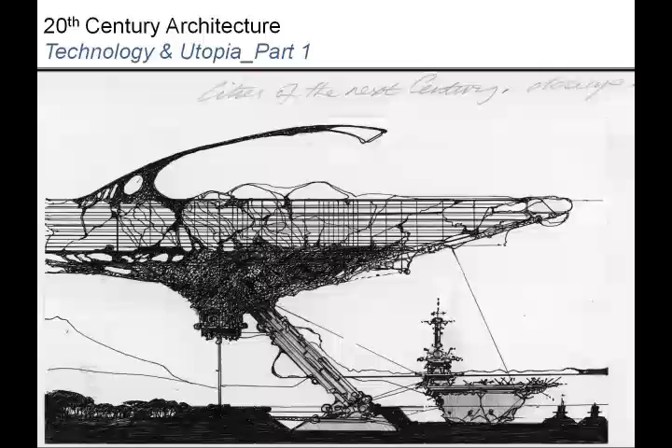Utopia has been a theme through the 20th century. This is the idea of an imagined place or designed place in which everything is perfect. We've seen examples of utopian urban planning.

In this particular lecture, we're going to look at utopia and technology as it's manifested in the later half of the 20th century. What we see is an emergence of demand for the democratization of architecture through the mediation of technology. The social and economic shifts at the end of the 50s formed the demand for a new functionality and led to a reconception of architecture beyond the built singular object.

So architecture as an environment, architecture as a spatial field for the expression of the relations and processes of an increasingly complex world.

What we will see in today's examples is that from the late 1950s to the early 1970s, there were several groups of architects who radically modified the boundaries and definitions of architecture. The rejection of the modern movement, specifically the paternalist practices, and now there is a quest for an other architecture. These radical groups seem to almost unanimously attempt to orchestrate a liberation from architecture, which until then was perceived as a discipline oriented toward construction.

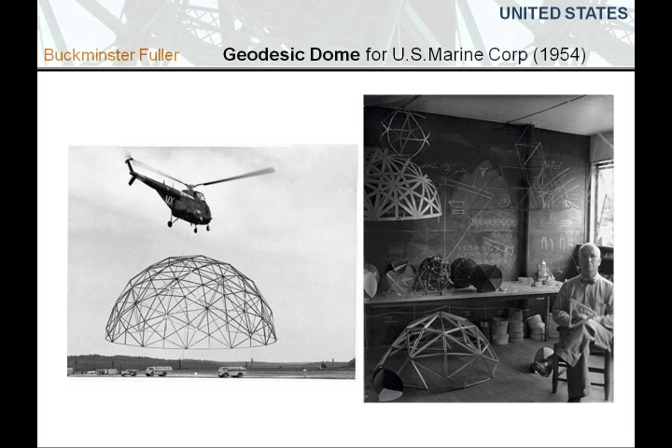This was designed for the U.S. Marine Corps in the 1950s, and again was proposed as a quick-assembly prefabricated element that uses geometry to create an efficient and extremely stable form.

Here you can see the cover of a document that was the study of shelter logistics for the Marine Corps Aviation.

So in the 1950s, the U.S. Marine Corps put the geodesic domes of Buckminster Fuller to the test. They concluded that domes were, quote, the first major basic improvement in mobile military shelters for the past 2,600 years, unquote. This particular volume is quite rare and now out of print.

Earlier in lecture we saw Buckminster Fuller's Dymaxion house, and these military-derived forms made their way into civilian and even domestic applications with some tweaking.

In this image, workers are seen assembling the first rows of aluminum tubes in October of 1959, building the Climatron at the Missouri Botanical Garden. The tubes created interlocking hexagons, or six-sided structures, to form a 70-foot high dome that needed no interior vertical support, allowing this huge open span.

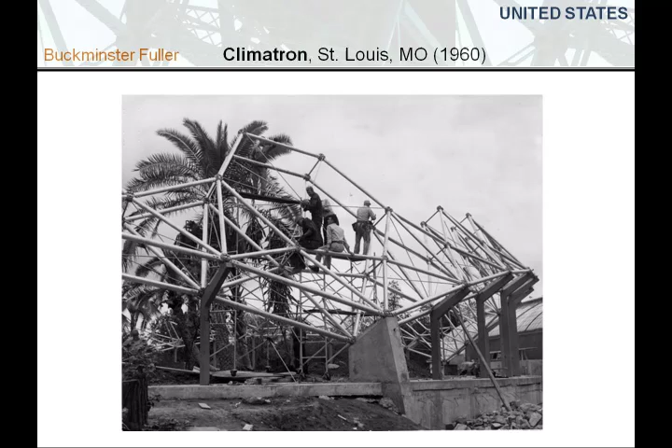It was, in 1960, the largest clear span in the world.

Other speculative projects include this one, the Dome over Manhattan, a project for New York City in the 60s. In the 1960s and into the 70s, the idea of a domed city came out of science fiction and seemed like it might actually become a reality.

The first of these is when Buckminster Fuller proposed a 2-mile wide geodesic dome spanning Midtown Manhattan. The goal of this dome was that it would regulate weather and reduce air pollution.

While the dome over Manhattan was not realized, this project, the United States Pavilion at Montreal's World's Fair in 1967, was. This is now the biosphere, and it is the synthesis of Fuller's philosophy about building and art.

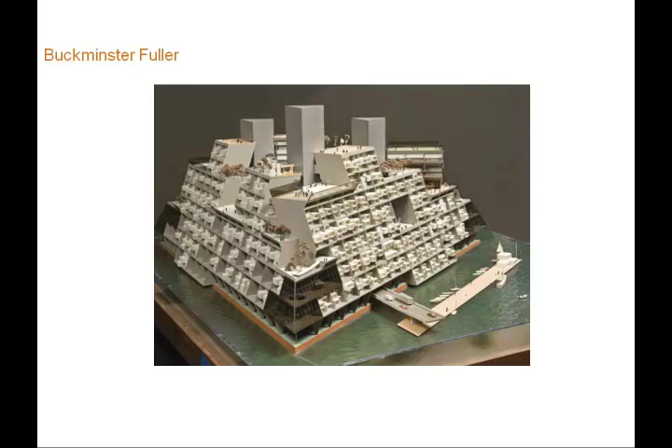So moving on from people like Fuller, and he's really sort of a unique figure in this conversation, we're going to look at a series of other groups, starting with the independent group.

This was a highly significant collection of writers, thinkers, and creative practitioners who met at the ICA in the 1950s. They are most often valorized as the fathers of pop, but I like to think of them as critical thinkers who created practices about visual culture that focused on new ideas.

Leading artists such as James Stirling, Colin St. John, and also Reyner Banham, contributed to this interdisciplinary group and participated in many of their group events.

Speaking of Reyner Banham, this quote is useful for some of what we're going to look at next: when your house contains such a complex of piping, flues, ducts, wires, lights, inlets, outlets, ovens, sinks, refuse disposers, hi-fi reverberators, antenna, conduits, freezers, heaters—when it contains so many services that the hardware could stand up by itself without any assistance from the house, why have a house to hold it up?

One thing the Independent Group did, through a series of exhibitions, was ask exactly these kinds of questions. Growth and Form in 1951 was a science and art exhibition based on a volume by D'Arcy Wentworth Thompson called On Growth and Form. What you can see here is an interest in biomorphic form—biology—and also in structure.

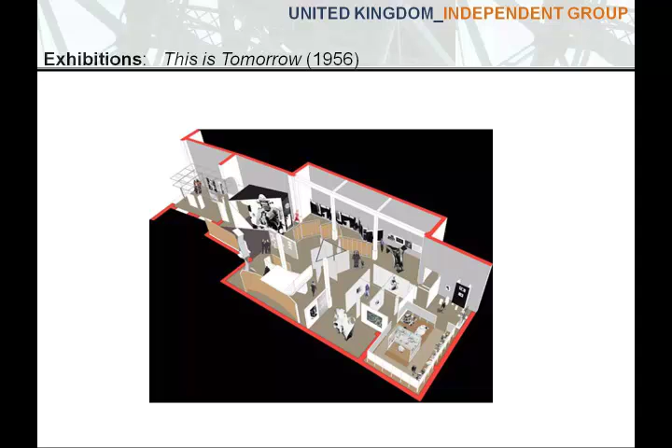Now, Archigram is another very important group. It was formed in the 1960s at the Architectural Association in London by six architects and designers: Peter Cook, Warren Chalk, Ron Herron, Dennis Crompton, Michael Webb, and David Greene. We're going to look at a few of these different designers' projects in the next few slides.

In 1961, Archigram—a name derived from the combination of the words architecture and telegram—was born as a single-sheet magazine filled with poems and sketches. As David Greene wrote in the first issue, it was meant as a platform for the voices of a young generation of architects and artists.

Quote: 'A new generation of architecture must arise with forms and spaces which seem to reject the precepts of modern, yet, in fact, retain many of those precepts. We have chosen to bypass the decaying Bauhaus image, which is an insult to functionalism.' Unquote. Archigram's vision did in fact succeed in inspiring a new generation of architects and architecture.

Most obviously, their radical suggestion to reveal infrastructural elements and reverse traditional building hierarchies inspired the famous Pompidou Center by Richard Rogers and Renzo Piano. Their drawings and visions continue to be invoked in urban thinking today.

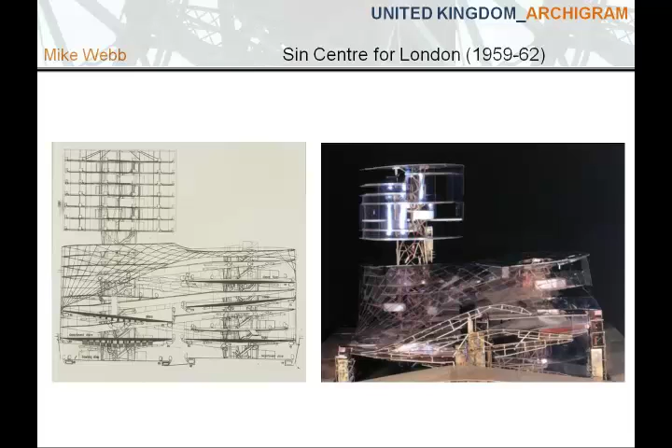It was proposed for the site on Empire Theatre in Leicester Square in London. And in this project, Webb attempted to bring together separate elements of showtime audience and parked cars with inclined planes that form a winding ramp system.

The entertainment palace consists of a bowling alley, a cinema, theater, coffee bars, and dance areas. Furthermore, there's a large department store at the ground level and office space above. The spaces are designed to allow for easy circulation around the facility.

Crossover ramps allow easy movement for the cars and parking. Cables hold the entire structure together, and the floors are hung by tension cables from heavy cantilever beams supported off the top of staircase towers.

So here, let's pause for a second and consider the idea of Utopia. Some sort of idealized entertainment palace and technology. So this particular structure is only made possible through new technological means, new material sciences, a new understanding of structure.

Between 1960 and 1974, Archigram created over 900 drawings, among them the plan for the Plug-in City by Peter Cook and Ron Herron. This provocative project suggests a hypothetical fantasy city containing modular residential units that plug in to a central infrastructure megamachine. The plug-in city is in fact not a city, but a constantly evolving megastructure that incorporates residences, transportation, and other essential services that are all movable by giant cranes.

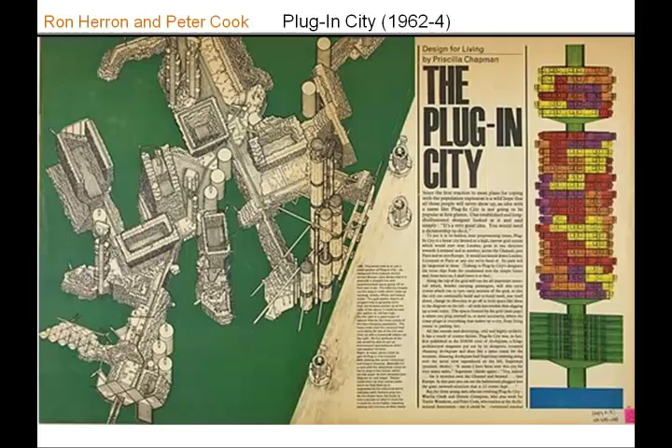The vision that Herron and Cook had for the plug-in city is for a computer-controlled society where buildings are in fact kind of expendable. The project questions: 'What if the whole urban environment were structured for change?' Their design response is a dramatic, endless cityscape of stacked capsules on superstructures, locking together yet easily removable by crane.

In Archigram 3, Warren Chalk writes, 'The home, the whole city, and the frozen pea pack are one in the same' - a real manifesto of the plug-in concept. On the same page, Chalk wrote, 'The idea of an expendable environment is somehow akin to anarchy, as in order to make it work, we would bulldoze Westminster Abbey.'

He is right about the attitude toward expendability. And the idea of the plug-in city was called soulless in the Sunday Times article of 1964.

In the drawings, the plug-in city is envisioned to encompass huge areas of land as superstructures connecting the ends of the country. Yet each building outcrop is deliberately different to avoid being a deadly piece of built mathematics. So they're clearly rejecting that universal idea of modernism. Still, the laneways, cranes, and airships of the plug-in city are deliberately emphasized and are the constituent and vital technologies of the city.

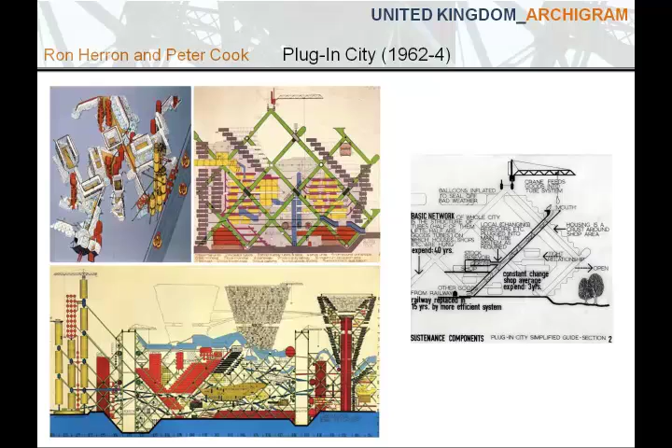Persistent precedents and concerns of modernism lay at the heart of Plug-in City's theoretical impulse. In his book Archigram, Architecture Without Architecture, Simon Sadler suggests that 'the aesthetic of incompleteness, apparent throughout the plug-in scheme and more marked than in megastructural precedents, may have derived from the construction sites of the building boom that followed the economic reconstruction of Europe after World War II.'

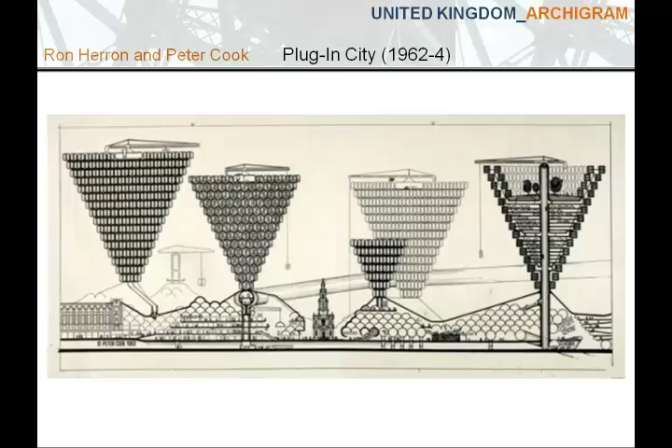The most controversial work of Archigram came in the form of the Walking City in 1964, created by Ron Herron. His creation sparked outrage at a London exhibition, as drawings and models demonstrated gargantuan tank-like cities mechanically moving on legs, crushing quite literally anything in its path, able to stop and exchange citizens and amass supplies at stations, also by means of a plug-in system.

According to Herron, his source of inspiration lay within Le Corbusier's statement, 'A house is a machine for living in,' basing the perspective that the house also survived for you in the harsh environment of the aftermath of a nuclear holocaust.

Cries of war machine and totalitarianism could be heard in much of the criticism of this particular project. Ironically, Siegfried Giedion accused Archigram of dishonoring the late Le Corbusier's name, even though Corbusier's quote was the keystone behind the Ron Herron project.

A Capsule Home by Warren Chalk was the beginning of Archigram's extensive work with the word capsule. Chalk was commissioned to design a prefabricated dwelling space capsule, and the only constraint was that they needed to stack. The capsule home quickly became a study in ergonomics. Using cars as an analogy, Chalk proposed a system of total interchangeability. Each cluster of capsules would have a crane overhead for opening out or clipping in the highly sophisticated parts. They were imagined to be pressed metal, though pressed paper was also considered for weight.

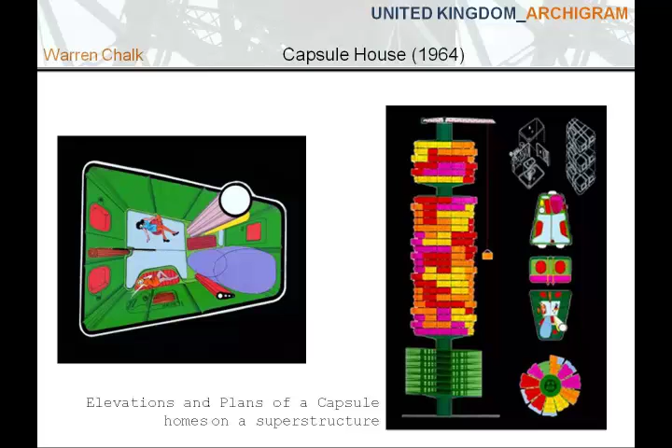The capsules, though a separate project, were realized to be the necessary form of the mass residence in the Plug-in City. The capsule home, even when separate from the city, inevitably implies a lifestyle of total urbanism, because they were seen as being a collective.

And here we can see an example of a capsule home. These are the Gasket Homes.

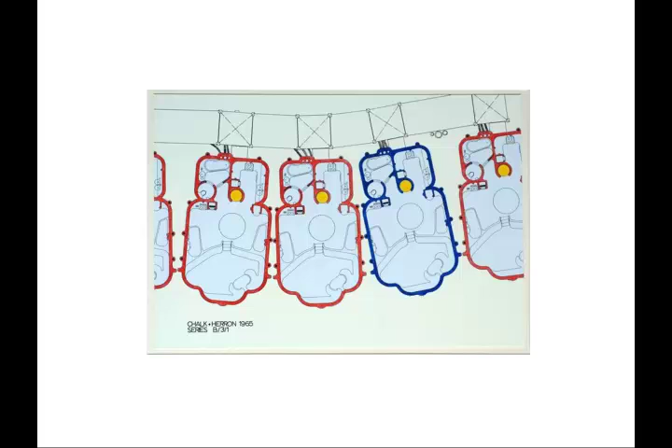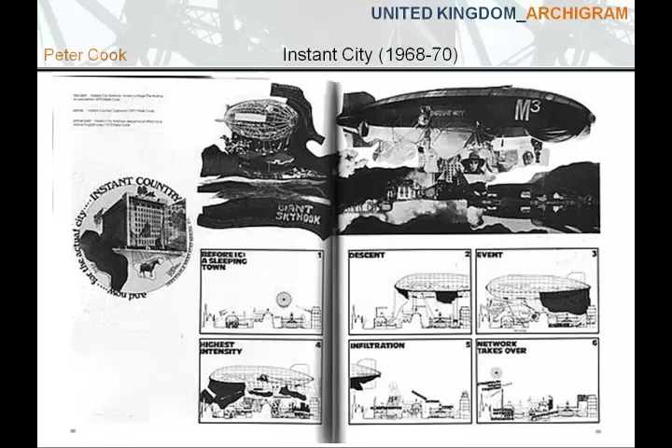Another project by Peter Cook is the Instant City. The idea was that using a hot air balloon or other flying vehicle, you could land and instantly create a new urban situation. Here's a close-up of the graphic. This here we see a Zeppelin activating the life of a small village in Instant City.

I hope in some of these images you're seeing the repercussions, the effects of wartime imagery. Imagine living in the United Kingdom through World War II with the bombings, then this kind of graphic showing these immense vessels landing over a city and changing it. There is an element here of unease and uncertainty.

Moving away now from Archigram, I'll talk briefly about Cedric Price, or CP as he was called. He was born at Stone in Staffordshire in 1934 to an architect father, and CP completed an undergraduate degree in architecture from Cambridge University and a diploma from the Architectural Association in 1957. After teaching at the AA and working for the architects Maxwell Fry and Denys Lasdun, he founded his own practice, and in 1960 began with his very first project, which was the Aviary for the London Zoo.

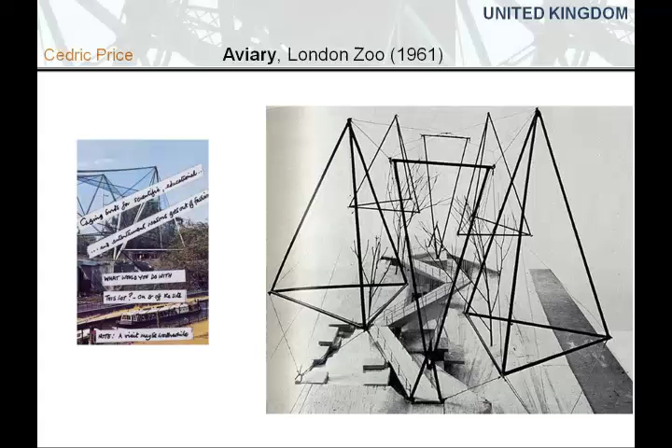While this is clearly an example of a built project, most of CP's reputation is chiefly based on the radicalism of his unbuilt ideas. But here we can see from whence his ideas were launched.

His 1960-61 project, the Fun Palace, established Cedric Price as one of the UK's most innovative and thought-provoking architects. Initiated with Joan Littlewood, the theatre director and founder of the innovative Theatre Workshop in East London, the idea was to build a laboratory of fun, with facilities for dancing, music, drama, and fireworks. Central to Price's practice was the belief that through the correct use of new technology, the public could have unprecedented control over their environment, resulting in a building which could be responsive to visitors' needs and the many activities intended to take place there.

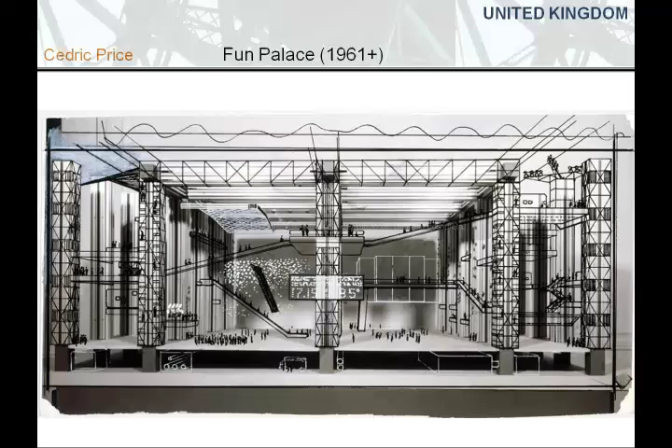Using an unenclosed steel structure, fully serviced by traveling gantry cranes, the building comprised a kit of parts: prefabricated walls, platforms, floors, stairs, and ceiling modules that could be moved and assembled by the cranes. Virtually every part of the structure was variable. Its forms and structure, resembling a large shipyard in which enclosures such as theaters, cinemas, restaurants, workshops, rally areas can be assembled, moved, rearranged, and scrapped continuously, promised Price.

Although never built, the Fun Palace was one of his most influential projects and inspired Richard Rogers and Renzo Piano's early 1970s project, the Centre Georges Pompidou in Paris, and I hope you see the similarities between the two projects.

Now, leaving the United Kingdom, where many of these ideas were being presented, we do see these in other parts of the world as well. So Yona Friedman was a French architect of Hungarian birth. He had studied architecture in Budapest, but then he had left to complete his training elsewhere.

In 1956, he attended CIAM 10 in Dubrovnik, which confirmed his belief that requirements generated by technological progress and demographic growth were too great to be solved by traditional social, urban, and architectural values and structures. In 1957, he settled in Paris and developed the principles of infrastructure, a skeletal metal space frame grid of several

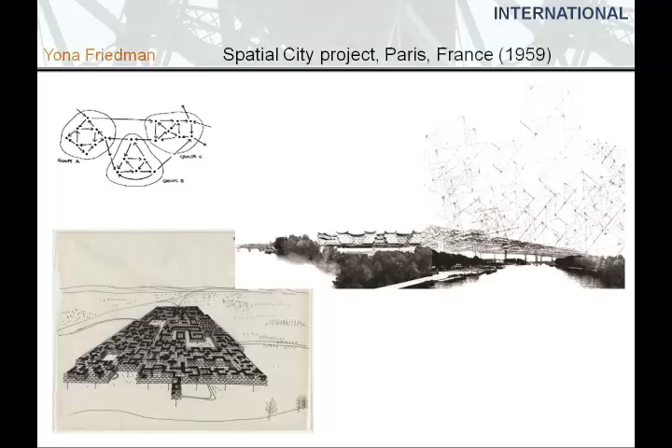The concept of mobile architecture was Friedman's contribution to the 10th CIAM Congress. It was during this session of the Congress that modernism was famously called into question as an outdated, static scheme, inappropriate for new global realities. Friedman's concept highlighted the relationship between social dynamics and architecture in the proto-postmodern world and suggested to architects how they could include that relationship in their thinking about the future.

The Spatial City project is an unrealized theoretical construct inspired by the housing shortage in France during the late 1950s and by Yona Friedman's deep belief that housing plans and structures should allow for the free will of the individual inhabitants. Not wanting to displace the city below, Friedman raised a second city 15 to 20 meters above the existing one. The framework was to be erected first, and the residences conceived and built by the inhabitants themselves.

The layout of each level would occupy no more than 50% of the overall structure in order to provide air and light to each residence as well as the city below. The project was designed for construction anywhere and was meant to be adapted to any climate.

And we'll end with this project. This is the Cluster City project by Arata Isozaki. And it's loosely associated with the metabolism group in Japan that we'll talk about in the second half of this lecture. So Isozaki designed clusters in the air in 1960 and '62, proposed for the city of Tokyo. The concept of the clusters was to develop a new way to structure housing around Tokyo. These clusters are supposed to represent leaves from trees, which are the housing units, and the core represents the trunk.

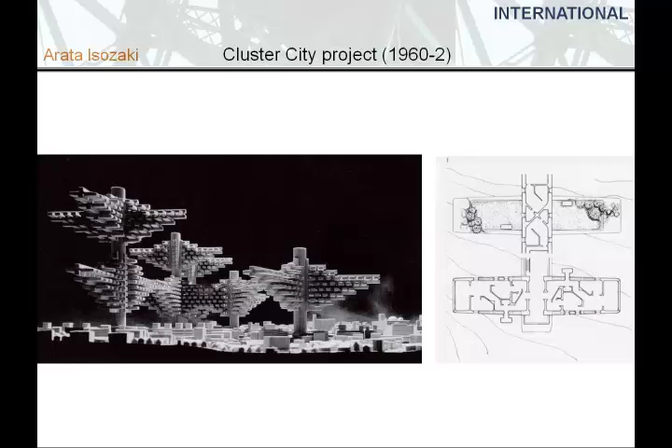So in these projects we see an innovative move away from traditional notions of architecture, the idea of clustering, of modules, of prefabrication. And the goal was to unsettle and unseat traditional construction methods and to introduce technology and utopia as a partnership for the future.